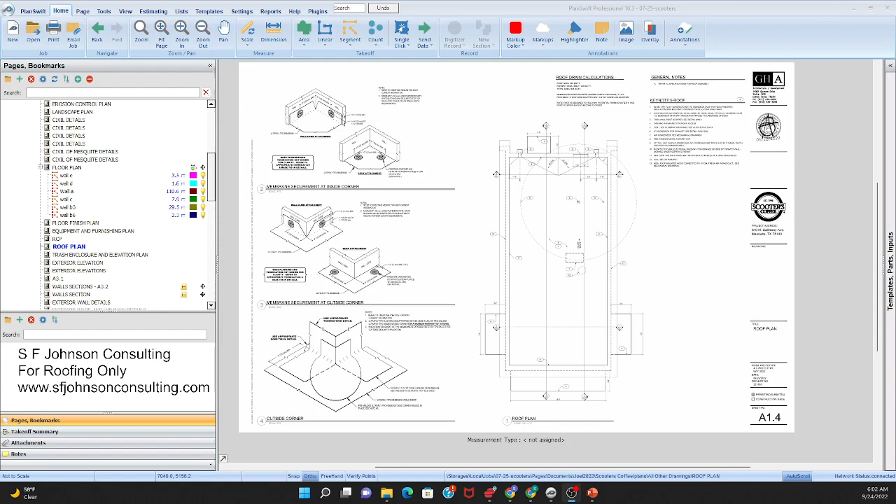This program covers basics, estimating, and safety related to the trade, and we always start with the estimating or takeoff portion to introduce it. What we have here is a small roof for a Scooter's Coffee, and this is the scope of work. The keynotes on the roof show it's a TPO roof, 60 mil, over a half-inch DensDeck over poly insulation. So we need to determine how many square feet of TPO we need, and check if we have parapet walls, which we do.

How many square feet of that do we have? Chances are the roof finish is going to go over the parapet wall. We also have some parapet caps, so we need to determine that, and this is typical for every roof, so it's not really anything unusual - just the square footage of the finished material.

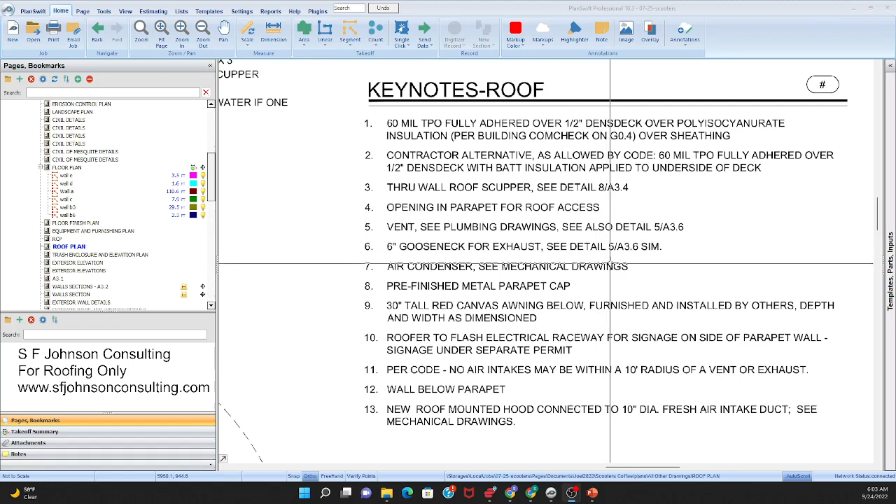We also need the cricket sizes, possibly, and how many linear feet of flashing for a particular purpose. Anywhere a wall and roof meet is usually a place to put the flashing, so I always give the perimeter of the roof, and any of the cricket lengths.

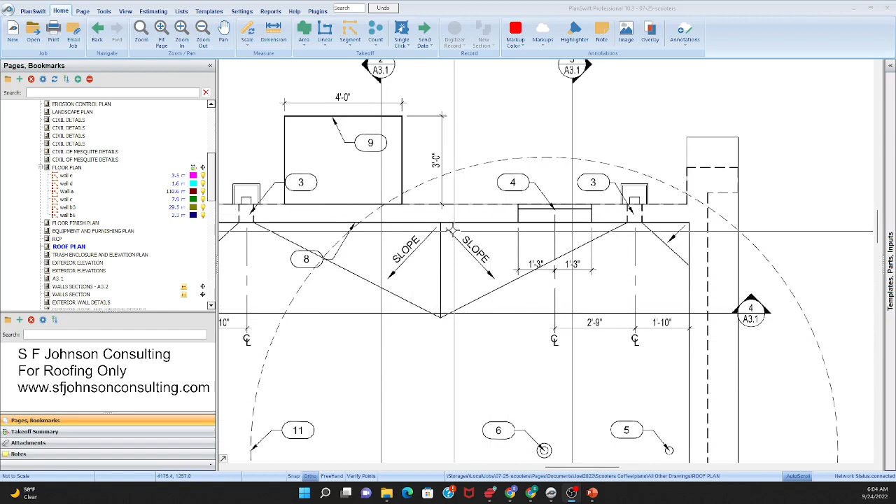What's a cricket? It's just additional framing we place over the main framing to give it a slope so the water doesn't gather. The arrows indicate the direction the water's going to flow - we want the water to typically flow in this direction towards the valley.

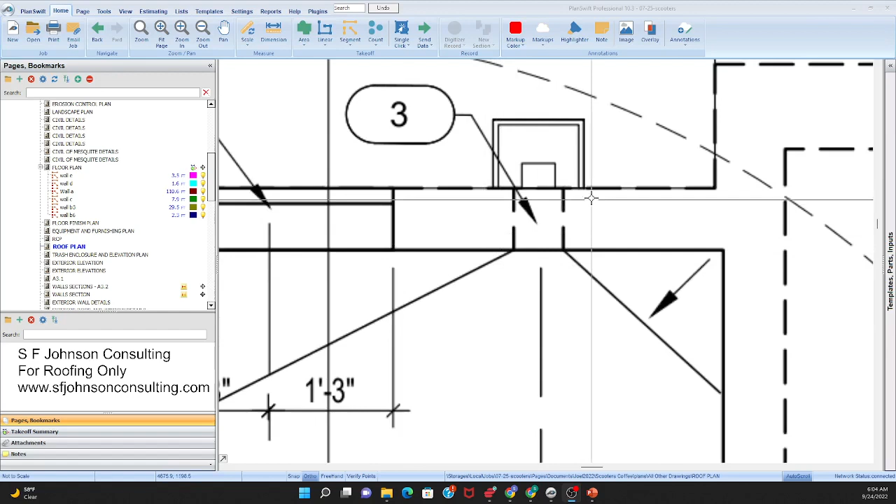We want the water to flow towards the valley, usually to some roof drains or gutters, downspouts - and I'm sure number three, that's what that is.

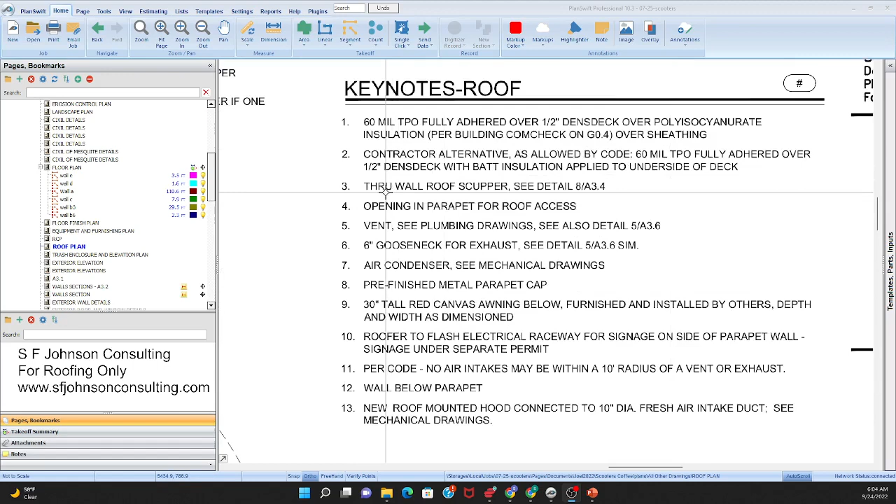A roof scupper. So what do we have to do? How many square feet in total? We have to measure how many linear feet the perimeter is, because chances are the parapet wall goes the perimeter of the building.

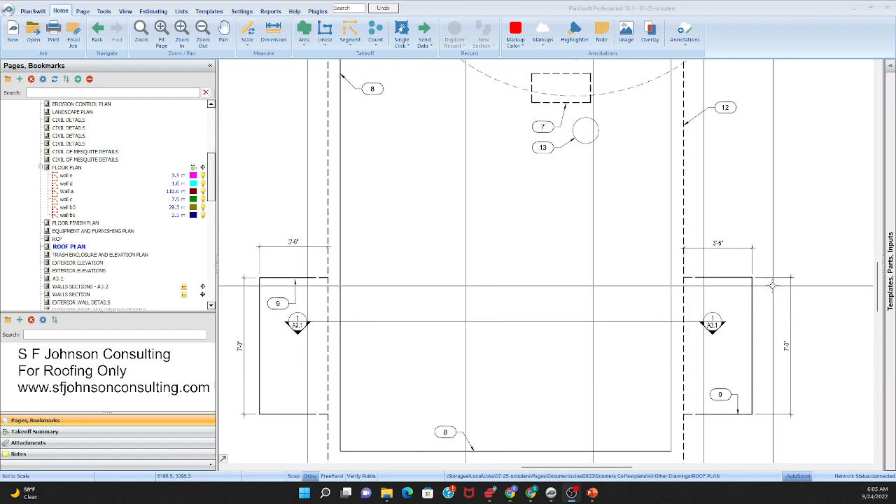We're going to look at the section views - that's a building section view, so we can see the thickness of the insulation and all the other details. From the plan view we can only determine how many square feet of the finish, plus how many linear feet. So for the roofer, square feet of the finish - always determine how many square feet of opening we have. This is an opening for a rooftop unit or condensing unit or something like that.

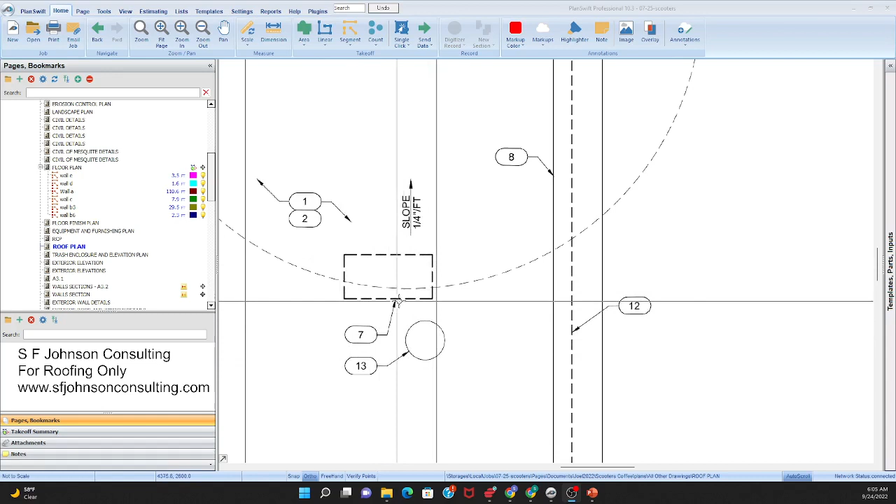We want to know how many square feet, and since it's a circle we just square it out, because we do want to give the roofer how many square feet of opening, because they're going to deduct that if they want to. It's just waste, right? Deduct that from the total area of the roof.

So, area of the roof, perimeter of the roof - we're going to have to look at a section view to determine the parapet height. So let's go here.

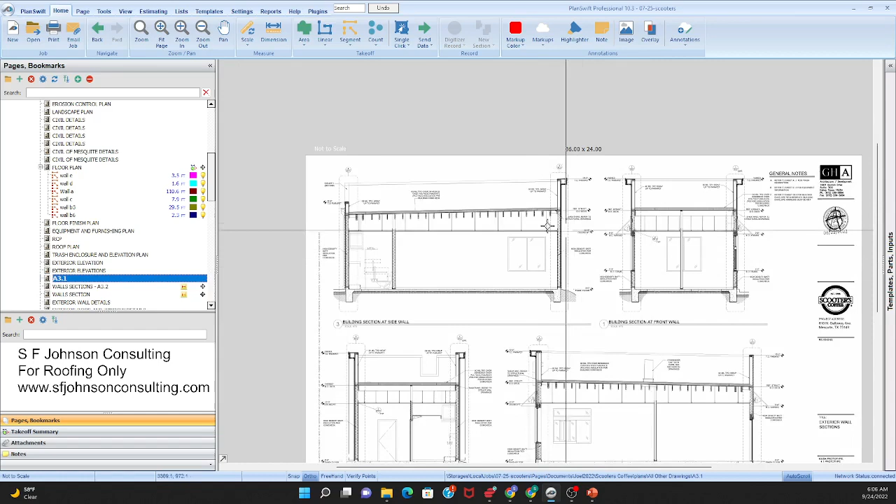The full height of the shear walls - shear wall height usually goes the full height of the building, so now I know the shear walls are going to be this height, so I can use this for that.

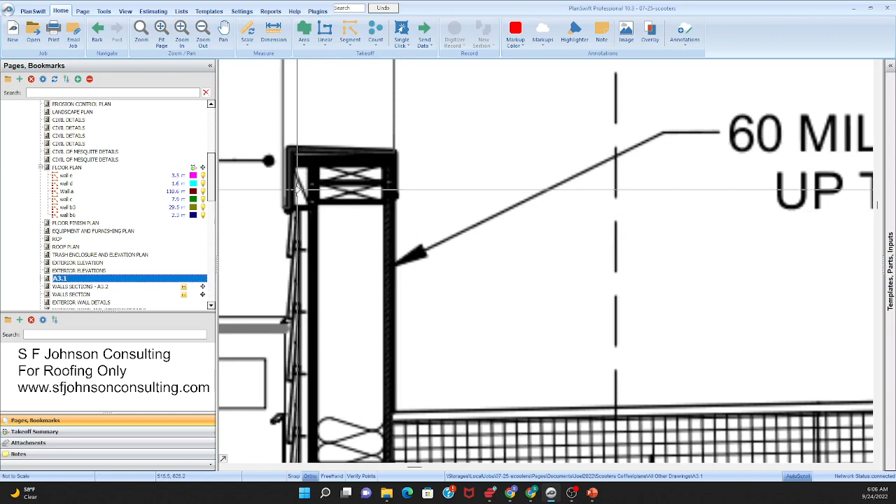I can use it for the thickness of the insulation, I can use it for finished carpentry. This looks like two top plates and another, most probably at the perimeter of the building, and so for my roofer this tells me my roof finish - and I can look and see that this is the board insulation as opposed to the batt insulation.

And if I'm the insulation professional, I can use this too to determine the height of my insulation.

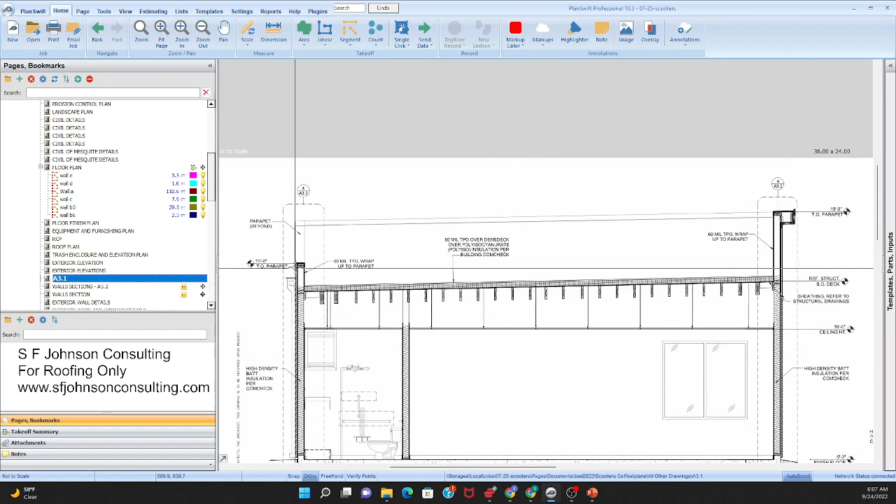A lot of good things from this view. But because we are the roofer, we have to make sure we go to the next view. Why? Because this is a call out, right? A detailed call out, meaning it's telling us it's going to call out just this portion of the building.

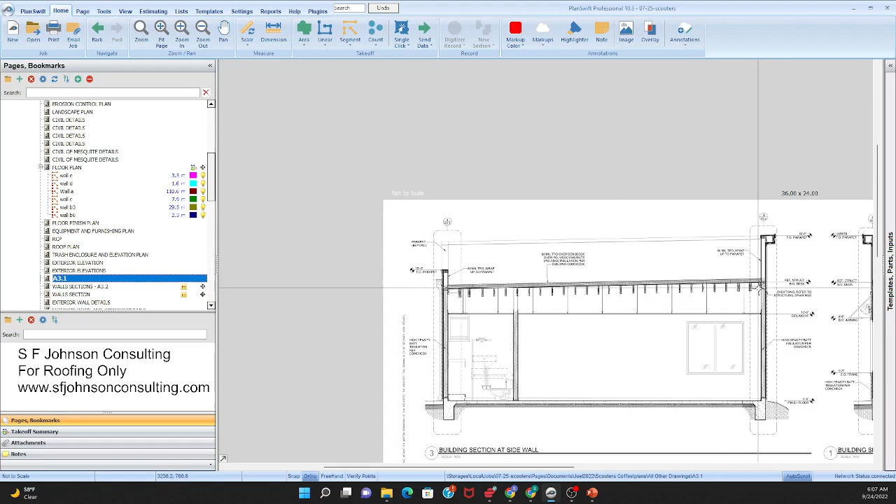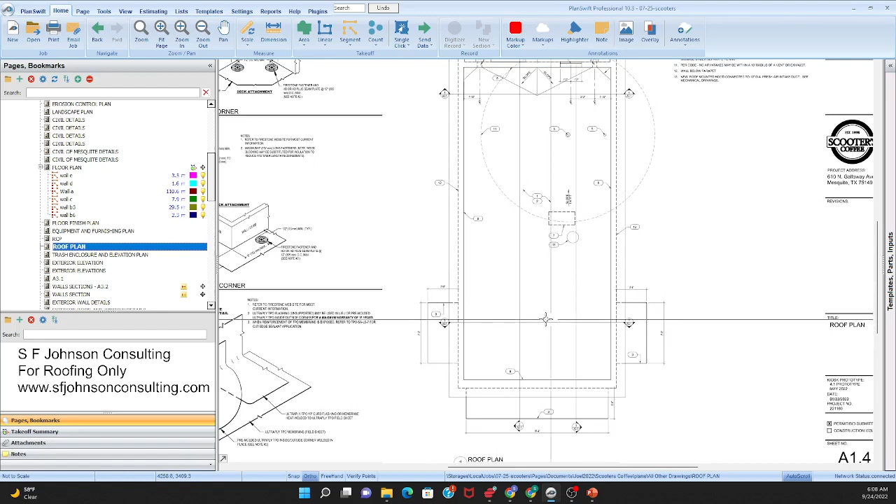And because we're the roofer and our roof is showing right here, we know that our parapet wall looks like it's a different height based on the side of the building. So we have to go back to the roof plan, and the 1 over A 3.1 would be the height for these walls, because that section view goes through both walls. So that indicates that both of these walls are based on that height.

Now, once we get here, it's going to change. We're going to look at 4 over A 3.1. So if that parapet wall happens to be a different height, it's going to be at this point forward. We're going to calculate the different height. But for this whole section, till we get here, it's going to be whatever height is shown.

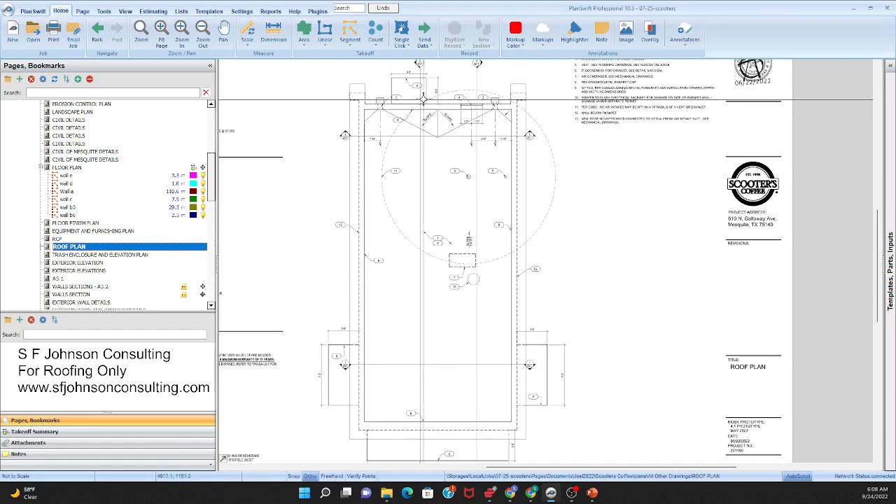And then these also have a different height. Then we'll look at 2 over A 3.1 for the height of these parapet walls. Because again, we can see that the parapet walls are a different height. Okay, so that's how we get that.

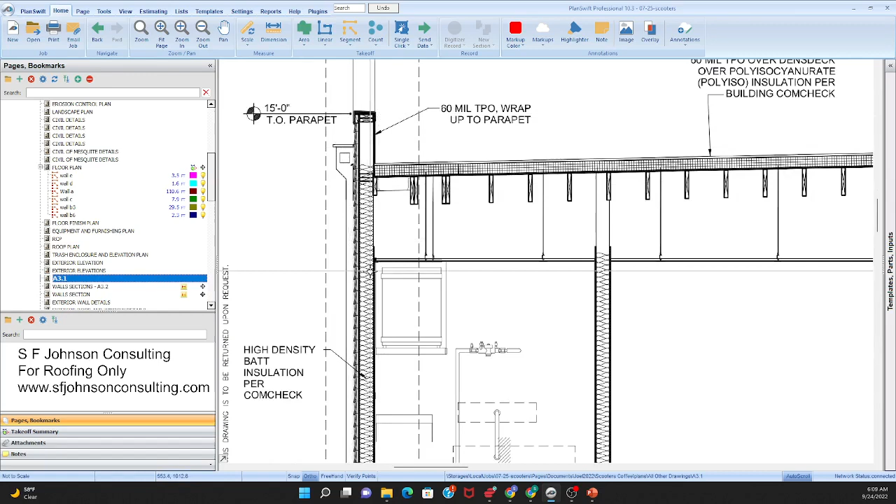So I want to go to more of the detail view, so I'm going to go to 4 over A 3.3. It still gives me another detail call out. So I got to follow every one of them because I'm the roofer and I have to make sure I followed every detail call out until there's no more.

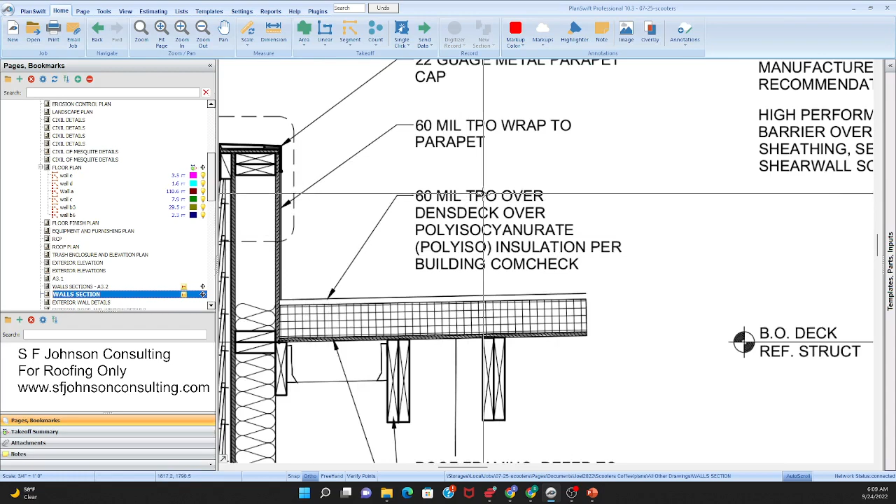So I still know a lot about this. I know that my finish is going to go up the parapet wall. I know I have a 22 gauge metal parapet cap that is this width, and I still got to go to 7 over 3.4.

So you got to have patience. And because you don't want construction defects, right, you're going to make sure you go to every view that you're sent to.

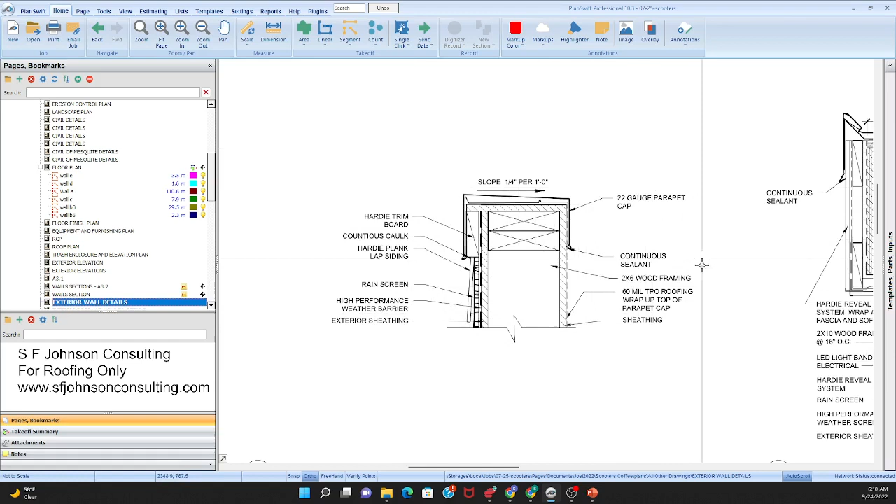And so we see here that there are no more views, no more call outs, no more anything. So this is the final of the views, the final of the detail views. And so as the roofer now, I know that I need to do all of this for my parapet cap.

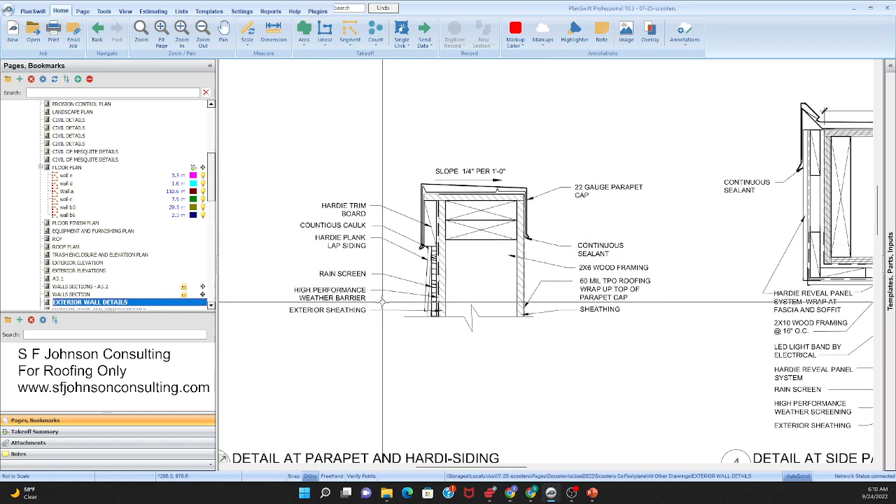And I know that even the rough carpenter is going to come to this view too, or have it, because they need to do all of this. And then if you're doing the siding, yeah, you're going to come here too. It's going to lead you here too. So all of the views are based on whatever you do.

If I'm the flooring professional, I'm not looking at these views because it's not my scope of work. But if I'm the rough carpenter, the siding professional, the roofer, all of these, it's my scope of work. Okay, so I have to go to every view.

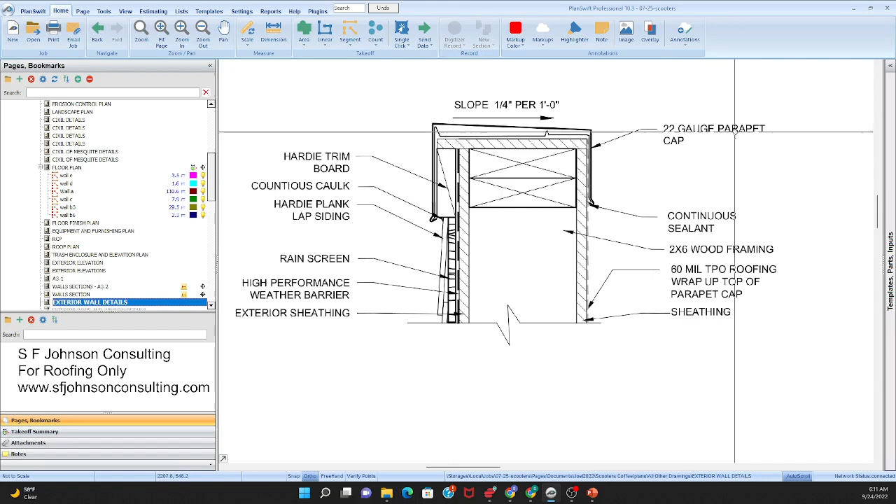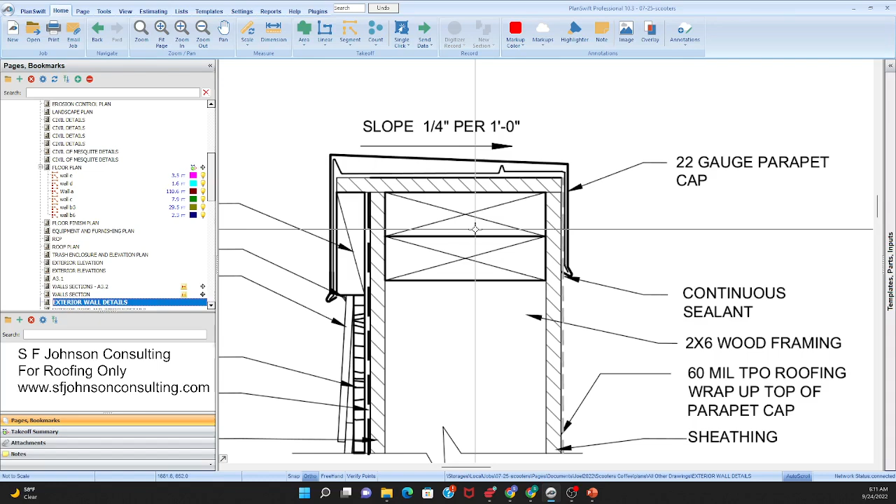And so now I know that, because I'm looking at the plan for my takeoff, even for the rough carpenter, I know I have 2 of these top plates. So 2 times the perimeter of the roof, if I'm doing my takeoff for that. I know I have the sealant, continuous caulking, so I know how many linear feet of caulk I have.

So I know from the container how many linear feet of caulking, 8 ounce, 16 ounce, 32, whatever, a bucket, whatever. So that way I can do a proper takeoff to do a proper material determination, material cost determination, right?

Rain screen, high performance weather barrier. You don't want to miss out on any of that, because if you do, chances are it's going to leak and you're going to have a construction defect. And if whatever trade was your trade, you'll be responsible for all the other trades that got damaged because you failed to do your portion.

That's what I did for a living: construction defect litigation adjuster. That's why you get that insurance. Just in case you don't know how to read a set of plans, you don't get to the detail call out number 6 or whatever, and you forget to put something in your construction, and you blow it and it leaks and somebody gets sued because now the whole building is leaking. Right?

Yes, so you want to make sure you know how to read your plans. Okay, come to the construction queen.

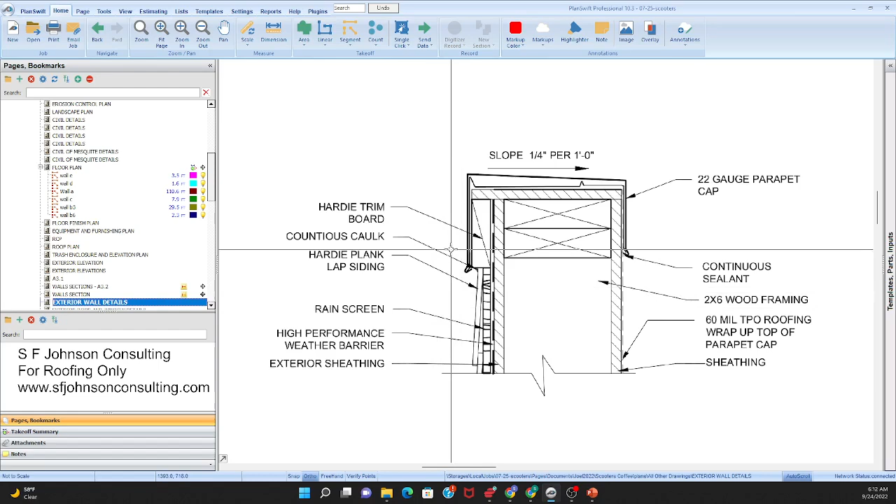I think this is the only time I ever referred to myself that way. What were you thinking when you came up with that name? Probably after a shot of tequila. See, I'm perfect for this job.

Anyway, roof plan. Okay, so here are our wall curb attachments. So whatever this is, you've got to make sure you account for it. It shows you how they want it up the wall, right?

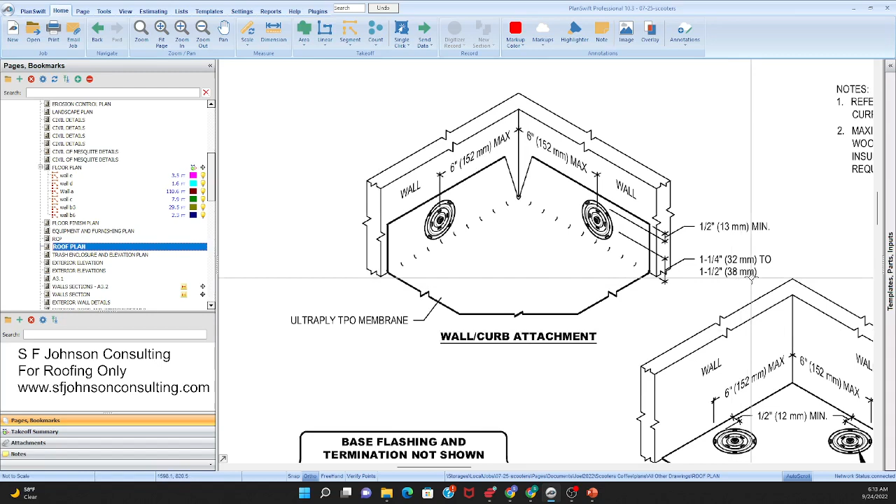Because what's the purpose of the roofer? To make sure no moisture gets into the building. So that's why we have the TPO roof on the roof and over the parapet, with a parapet cap and caulking so water doesn't intrude into the building.

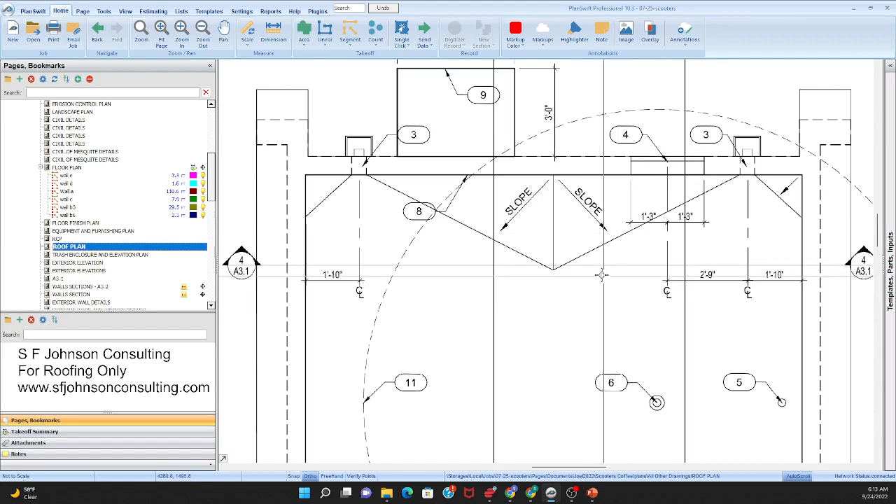So what do we do as the roofer? Square feet of the flat roof. Now we know we have to break up the section view, right? Because at some points this parapet wall is 3 feet, some points it's 5 feet. So we have to do 5 feet times however many linear feet, so we're accurately determining the additional TPO for the parapet wall.

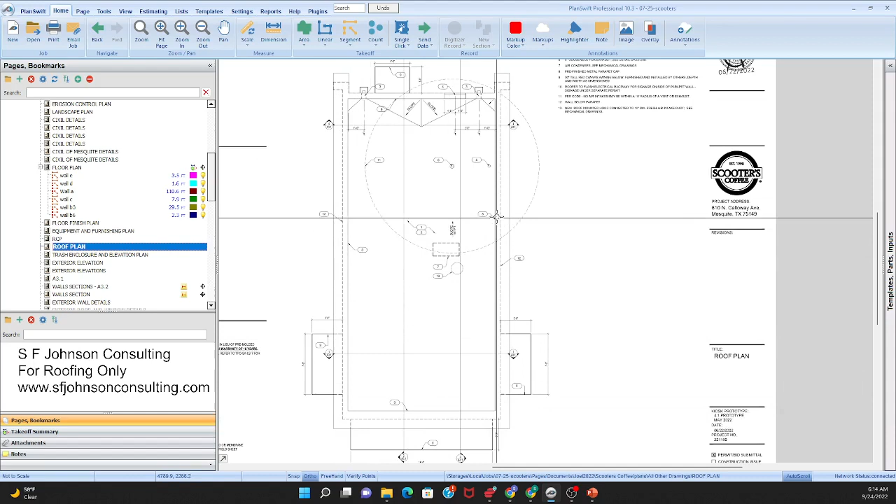And now we have to measure how many linear feet for the parapet cap and whatever else goes with our scope of work. And we have to make sure we're doing whatever this tells us for the openings, whatever this tells us, number 8, whatever this tells us, number 5, 6.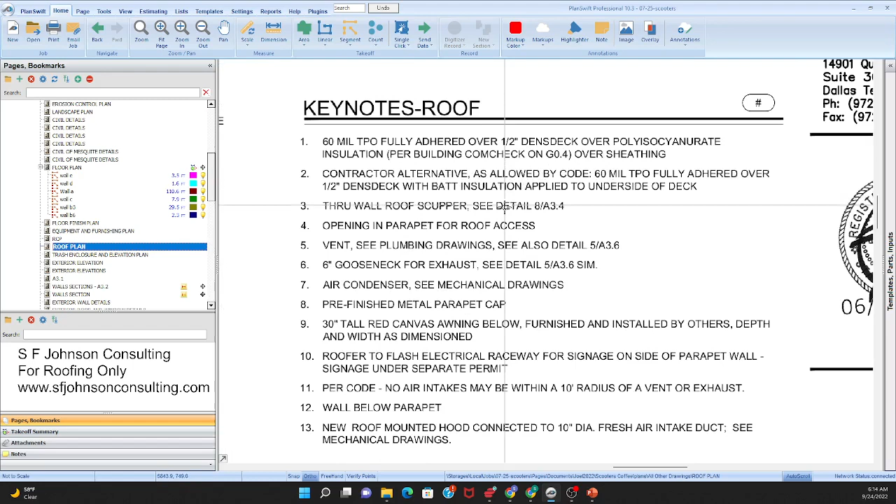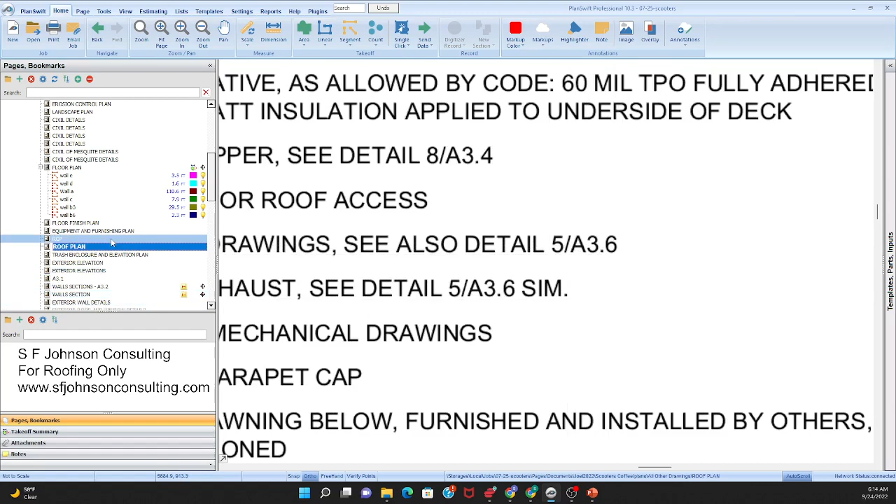Vent, that's easy. So we've got a flash and it's going to show us at 5/A3.6. Let's go to 5 over A 3.6.

Okay, so here's the vent pipe. Because what's the point? We don't want moisture coming into the building. So we have the vent pipe, that's the plumber, and now we have to do all of this. We're the roofer.

Okay, so you need to know how to do it and how to account for it. And so it's a vent pipe, so it's a circle. You could treat it like a square, that's fine.

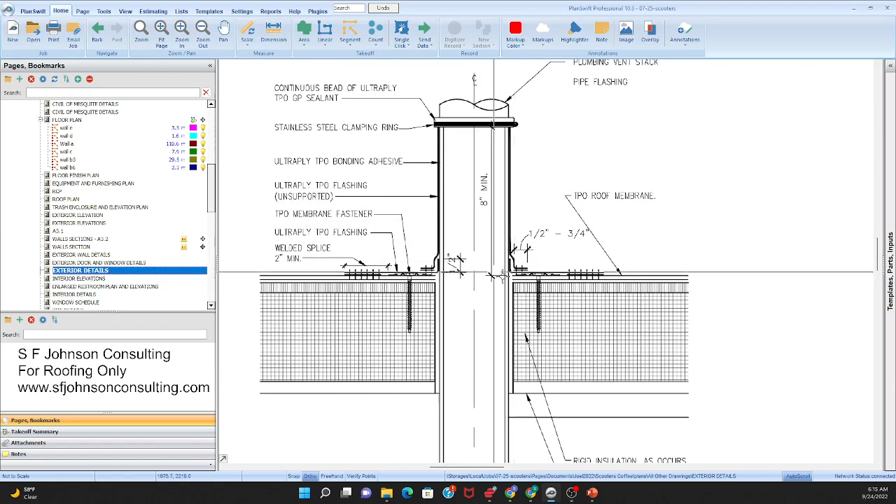When you're doing actual takeoff numbers for how many linear feet of TPO, to what point it tells you, I think, stainless steel clamping ring, sealant. See, what's the point? So no water gets down in there.

So you have to be able to follow every section view, detail view, so you're doing the right thing.

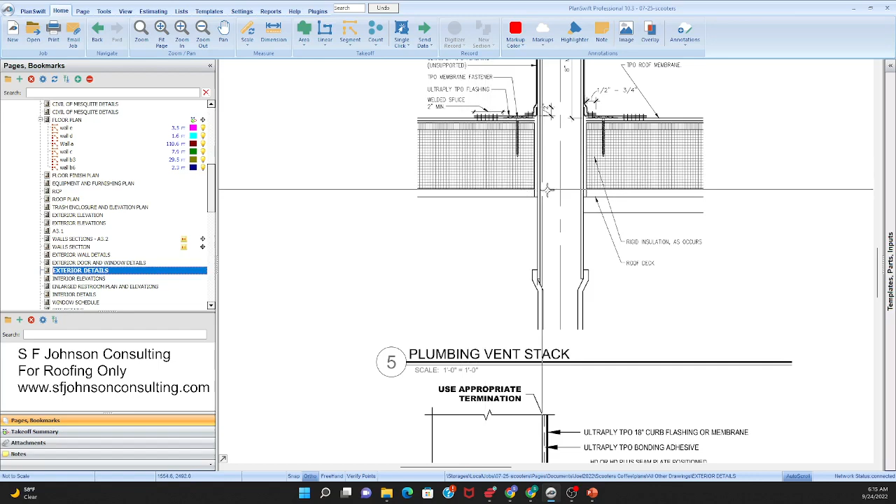Okay, roof deck, rigid insulation. And if this is to scale, which it is, then you can just measure what's the thickness of the insulation. That's the whole point of having something to scale. If you don't know, it's like 4 feet, 4 inches, 6 inches, whatever. What is this? This is different from that. So you've got to make sure what that is.

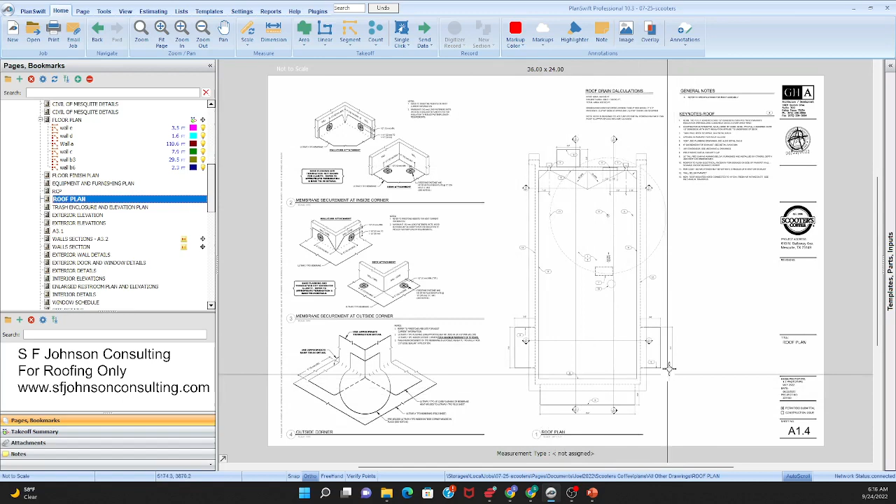Okay, so it's fun, it's a lot of fun. All right, so roofer, you are going to make sure you know how many square feet flat, how many additional square feet for your parapet wall, parapet cap, all the goodies that go with that, and know the heights.

That's why they give you the section views, because the section view marker is, what? This is, we cut down in 2, and now we're opening up and we're standing in here and we're looking at the interior construction so you can have a better view. And then that view will take you to a detail view most likely.

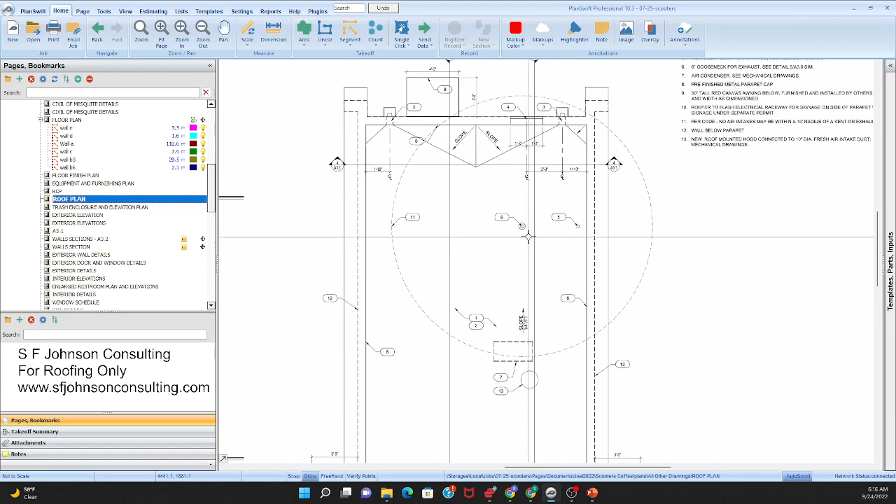Okay, and take you to all of these other places so you'll know how the vent pipes come and are flashed, and how the, let's see what 7 is. We didn't look at 7. Air condenser, see mechanical drawings.